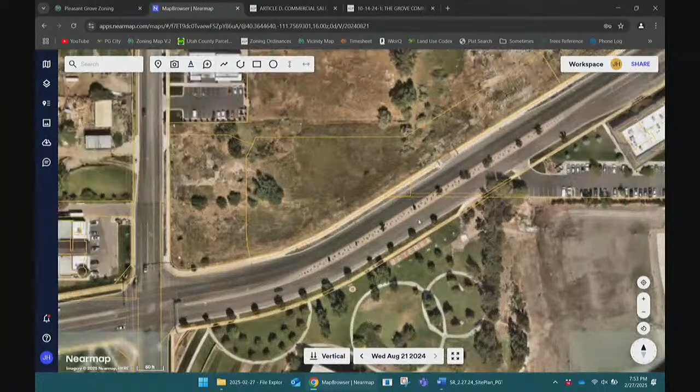This property fronts onto Pleasant Grove Boulevard, but access to this property will not be directly from Pleasant Grove Boulevard. Instead, it's going to be coming from that side over here, and we'll see that here in just a second on the site plan. Let me pull that up.

So we can see here on the aerial map how there's this road that comes through. This is going to connect up here to Pleasant Grove Boulevard, and from here, that's where access to this property is going to be. They're not going to get access from this side, because this side is a private road that belongs to the Green Grove Apartments.

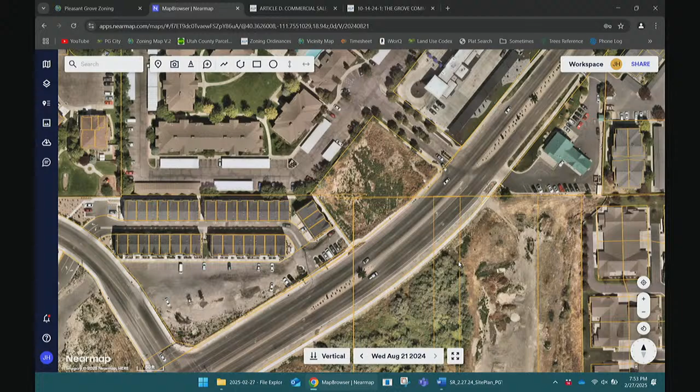What they're going to do instead, I'll go to the site plan now - even though they've got a little road here, there's going to be a fence that blocks off access for normal traffic from the private drive, from the private road. It'll be used for emergency services only. And if worst comes to worst, what they can do is install a geogrid thing, which compacts the ground a lot more, making it drivable for fire trucks, so they can plow through the landscaping there if they have to.

Because there is landscaping in that particular area, we're going to make sure that there's no trees or bushes that'll really get in the way, because that wouldn't be fun. But otherwise, yeah, that's the way the access for this property is going to end up going.

Continuing on with the site plan, the required building setbacks, including any area for parking, is 25 feet from the front property line down here. So this whole section is going to be all landscaping, except for points of access onto the property, meaning that little section right there.

There are no other setback requirements for this project, as the CS2 zone states that the rear and side yard setbacks are permitted to be reduced to 0 feet when adjacent to a commercial or industrial zone. Since it's surrounded by commercial zones, it gives them a little more room to make this site plan work. But to help out with the smaller setback requirements, there is an existing vinyl fence that was installed with the Green Grove Apartments on this side up here, which will help mitigate a lot of that difference between the residential use and the commercial use.

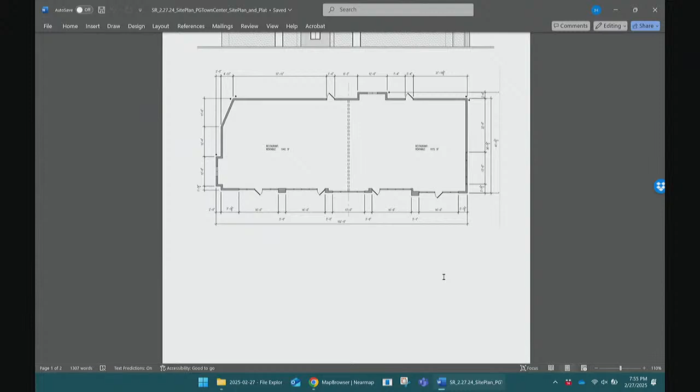Now the building will be split up into a couple different units. I don't think I have the floor plan here - oh, maybe it's down at the very bottom. There it is. So we've got two different units, both of these are going to be for restaurant uses, and each one is going to have their own individual drive-through. The parking requirement for restaurants is 1 space for every 3.5 chairs, or 1 to 100, excluding the kitchen, bathrooms, storage, etc.

Because we don't have a detailed floor plan that shows how many chairs they're going to have for each individual use - usually they'll provide that with the building permits - I did a parking ratio of 1 to 100 for the whole building, but then I reserved about 30% of it for what would usually be the kitchen or storage area or anything like that. In this case, I required 27 parking spaces on the property, and that's what they got - they got 27. So we're good to go on the parking.

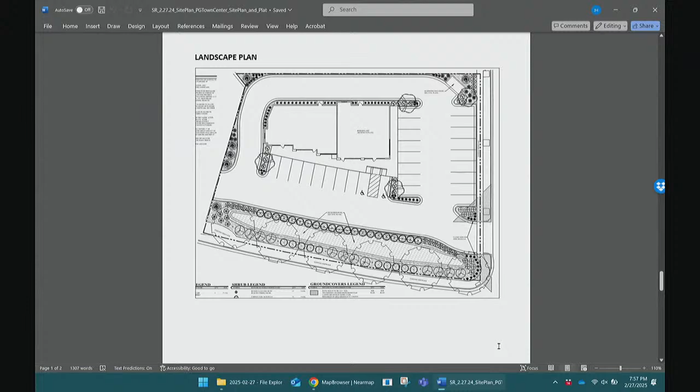Here is the landscaping plan. We'll need the applicant to amend this plan to account for the emergency access from Pleasant Grove Boulevard down here in this corner, just so they don't find themselves around a tree. But otherwise, the only other requirement is that they need to have at least 11 trees on the property, based on the ratio of 15 trees per acre of land.

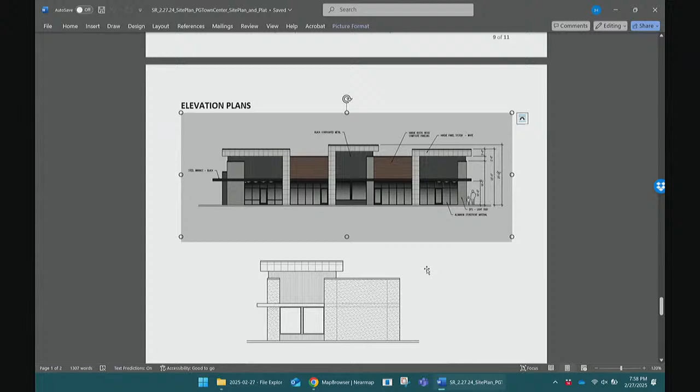I think that's about everything. So with that being said, I can take any questions. I can scroll through some of these images.

Anything you guys need? So on the site plan, Jacob, if you go there, or that, you stop. This one? You can go down one more.

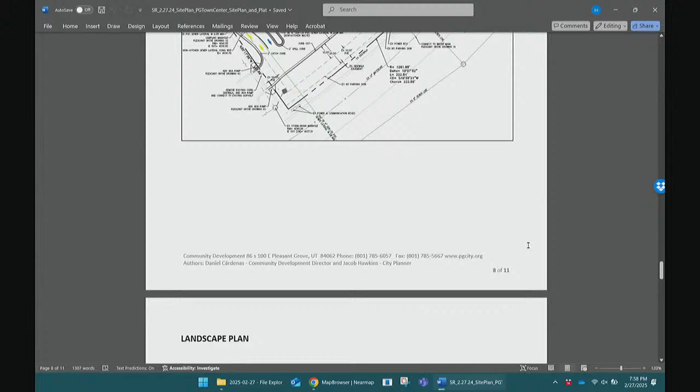Looking at that, even though the public access is going to be about right here, right? I'm curious about, it looks like that is an exit, even though it's not supposed to be an exit. The reason, and the other reason, wouldn't parking be a good thing for right here?

Not really, because this is kind of taking a belt and suspenders approach to emergency access, essentially. This is supposed to be the primary way for there to be emergency access, but because this is a private road here, if they decide to just block it off for whatever reason, since it's a private road, we still need to have some sort of access onto here. So instead of making the fire truck go through the landscaping every time there's an emergency, we want the primary thing to be there.

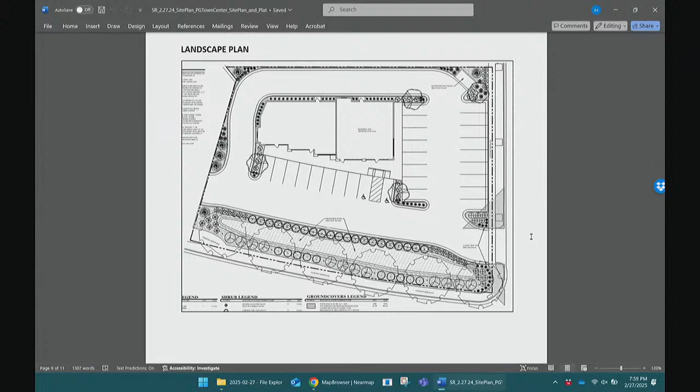Now, the other question is, because it's two restaurants, just looking at the drive-through plan, my assumption is that - so if you go up the one, there's a drive-through there, correct? The anticipated drive-through is here. Yep, and a drive-through is there. Okay, so I guess we can ask the applicant about traffic flow and what that looks like.

Got a nice little crisscross there, you see that? I see the crisscross. Hopefully the public will recognize the crisscross too. Those are the only questions I had. Thanks. Any other questions for Jacob? Thank you, Jacob.

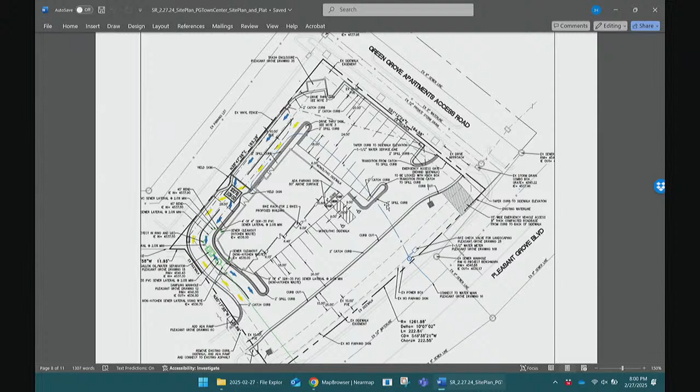All right, is the applicant here? Maybe you could just state your name for the record. Tom Longacre with Acres Development Group.

So the crisscross you had a question about - yes, it's an interesting development that's taken shape the last few years. It was talked about, how do we make homes pencil, or projects pencil. We've probably spent 40 to 50,000 of our dollars to try to come up with a plan for this site that pencils and works, and we need 2 drive-throughs for it to pencil. This project conception to have the 2 drive-throughs, we've seen done in various projects down in St. George, Santa Clara. I'm doing one right now with Panda Express up in Brigham City, and it is a new concept. The public does figure it out, it is a little bit of a process. We have this do-not-block area, and that's where people that have ordered their food are able to exit, and people are waiting. There'll be strong line indicators, there'll be arrows, and they will move forward as long as there's not a car blocking that area.

It was a concern, it's been a concern. I've done Panda Expresses for 20 years, and the fact that they're entertaining one like this, it's something they've had to wrap their heads around. They have 2,000 locations, but it's one that they're willing to pursue. And down in St. George, Santa Clara, if you were to visit, you'd see that it does work. Is there any physical barrier between those 2 lanes, or is it just all markings? It's markings.

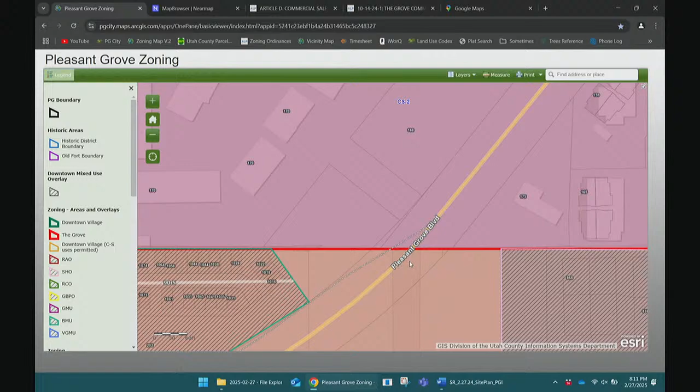Can we combine 5 and 6? Okay, so we are going to hear item number 5 and item number 6 together. Public hearing to consider the request of Dana Fairbanks for a 4-lot preliminary subdivision plat named PG Business Park 3, Plat B, condo plat located at approximately 364 South, 700 West on approximately .87 acres in the manufacturing distribution zone. And item number 6, public hearing to consider the request of Dana Fairbanks for a commercial site plan to develop a 1-story multi-tenant warehouse building located at the same address on approximately .87 acres in the manufacturing distribution zone. All righty. Hi, Jacob.

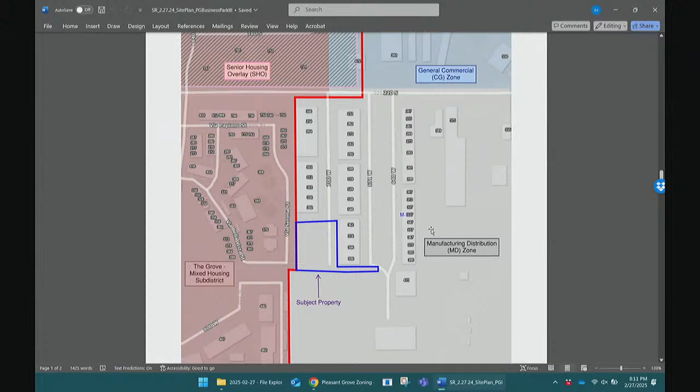So this next item is for Dana Fairbanks for a property located at approximately 364 South, 700 West, which is just on the other side of State Street. Let me go here - I like this one better. So we've got State Street right here, and then we're just up over here, essentially on the other side of State Street, this one right down here next to all these other warehouses.

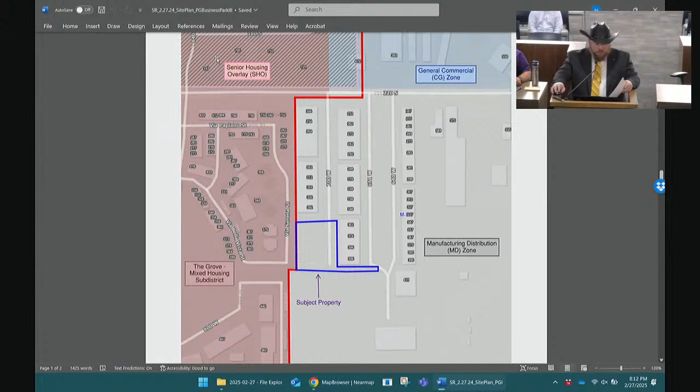So starting off with the zoning map, this property is in the manufacturing distribution zone, the same with all of these properties over here to the east and to the south. We've got a bit of general commercial up in this corner fronting onto State Street, and we've also got some condos and townhomes over here, all in the Grove Mixed Housing sub-district. These were built after these warehouses were built.

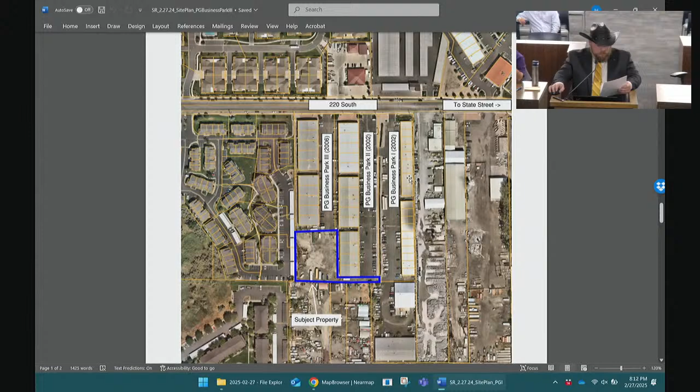As we can see here on the aerial map, this is a little bit better view, so you can see where all those condos are and the townhomes, and we've got some self-storage up here. So the applicant is intending to develop this property with more of what's already there - it's just going to be a 1-story multi-tenant warehouse building that will be split up with each unit being on its own lot, essentially because it's a condominium plat.

This one has a little bit of an interesting history as well. Development for this whole area began back in about 2002 through 2006, so this one was first. Actually, let me get this out because it's brighter. So these properties were done first through PG Business Park 1, and then these ones were next for PG Business Park 2, and then these ones were after that for PG Business Park 3.

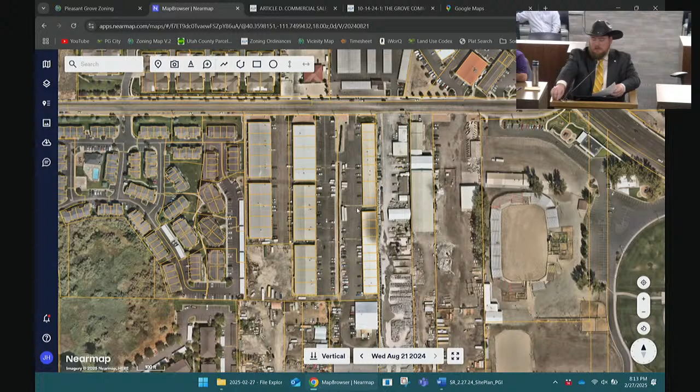Now, PG Business Park 3 included all of this, including the subject property at that time. So when it was first approved, all of it was just the one property, and so it met all of the zoning ordinances back then. The same thing for tonight, essentially, because a lot of that stuff has already been taken care of, and a lot of it's going to be taken care of for tonight's plat as well.

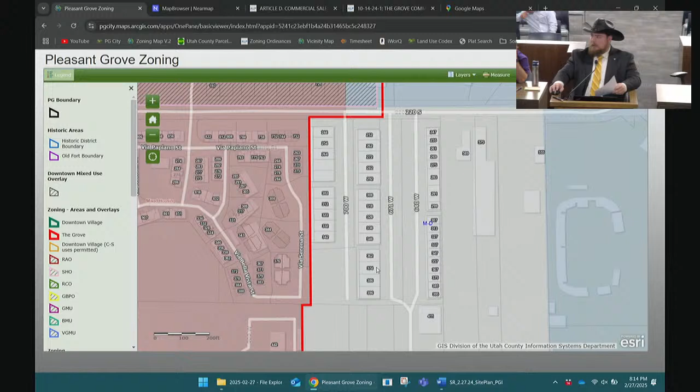Going into the requirements that have already been met: the manufacturing distribution zone requires a minimum lot area of 1 acre per lot, which isn't really possible since it's a condominium plat and you can't make each unit a whole acre. That was handled with the previous version because this whole area was greater than 1 acre at that time. The minimum lot width was 100 feet, and the setback requirement is 25 feet from the front property line, which is up here.

So all that has been taken care of, and the required landscaping is only required for the front yard areas and the side yard areas adjacent to a public street, so that's taken care of. Otherwise, because it's in the manufacturing zone, there are no design requirements for any of the buildings.

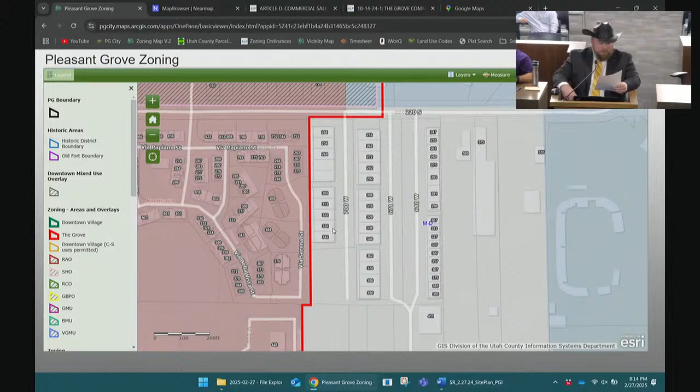Even so, the proposed building will be about 22 feet tall. Let me go to that. There's a landscape plan—they're going to do kind of rock mulch back here. Here's the elevation plans. It's going to be about 22 feet tall, the exact same as all the other buildings already there—a metal building, and on the front, which faces the parking lot, they'll have about 7 feet of brick for a wainscot, essentially.

Because this building is manufacturing in nature, there's a parking requirement for warehouses, manufacturing establishments, and all industrial uses: 1 parking space for every 6,000 square feet of gross floor area, or 1 parking space per employee at the highest shift, whichever is more restrictive. But we don't know how many employees there will be, so we're going with the square footage for right now.

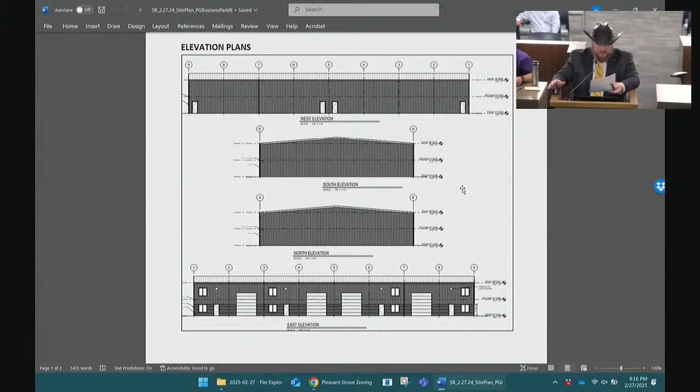In this case, technically only 3 parking spaces would be required, but the applicant provided a few extra details for how much space would be used for an office, a mezzanine, and the warehouse area. So they provide 26 parking spaces for the building. 17 of those spaces, as you can see on the site plan, cross over the property line. What the applicant will do is record an easement with this property at the same time as the plat is recorded, ensuring that parking stays there.

Ultimately, staff recommends approval of the proposed plat and site plan, and I can take any questions if you have any.

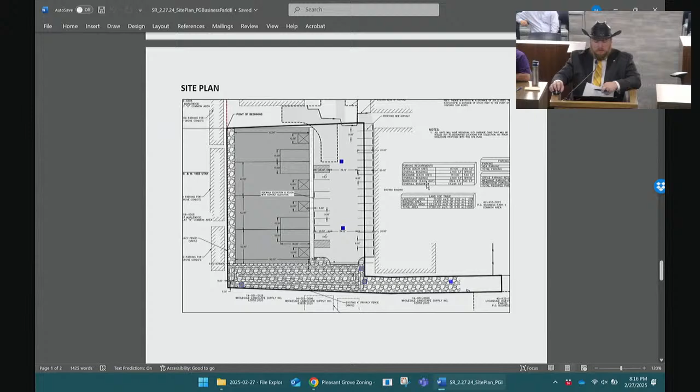What's it being used for right now? Is it for storage of RVs and? It's nothing right now, really. On the current subdivision plat it was labeled as future development, and they're kind of using it as a drainage easement, and there's technically a really little wetlands area right in the middle. I don't really think it's there anymore because it's kind of just dirt there. So it's just vacant for right now, but with this they're just going to put up the warehouse and make it the same as all the other ones.

If there was a wetland there, shouldn't there be an environmental study to make sure it's not there anymore? Commissioner, Chair and Commissioners, during the process of this review we actually went through that process, talked to the Army Corps of Engineers, and verified that—because their map shows it is a wetland, and that's where that came about. That's what Jacob was referring to.

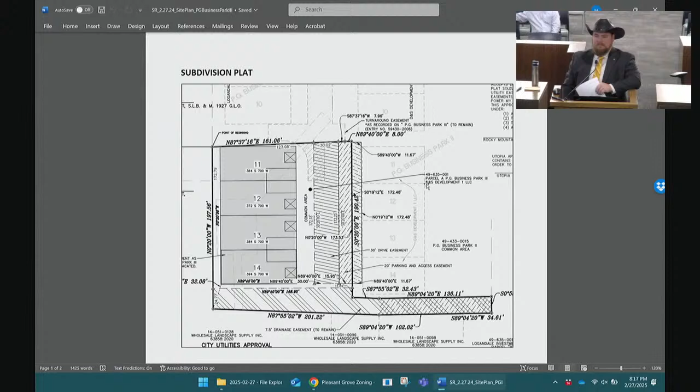In the process of talking to the Army Corps of Engineers, they mentioned that sometimes places made into a detention basin—they flew over with LiDAR, if you're familiar with that. Basically they scan the earth and see something that looks like a depression that might have water in it, and it might be a wetland. So they actually put that in as a level of a wetland.

But in this case, it was a detention basin that was put in, like Jacob mentioned, as part of the other plat, and they're just relocating that to the south end of the property while still managing all that water. So there really is no wetland there—there never has been, and there won't be. There are some in the neighborhood, so it's a very valid point to verify and check, but this particular property doesn't have that, and the Army Corps does not have a problem with the development that's happening.

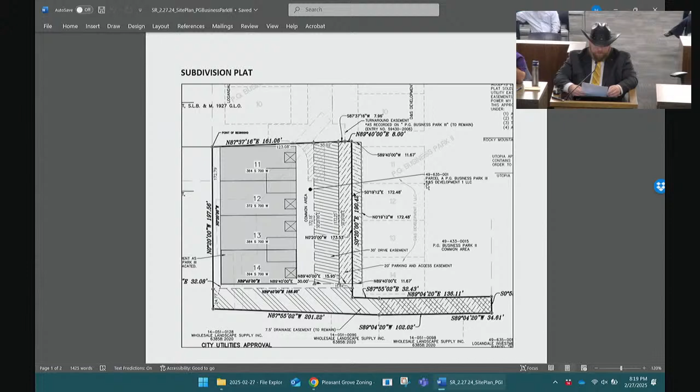Any other questions for Jacob? For the parking, what did you say he was going to get with the adjacent property owner? So he is the adjacent property owner right now, but what he's just going to do is record an easement on that property.

He is the property owner. I was going to say if we needed to make that a condition of approval here, we could, but if he owns both properties, he's probably going to give it to himself. Yep, it's gonna be a long meeting.

Yeah. You can argue with himself. Thank you, Jacob. Thank you.

Is the applicant here? Do you want to come up to the podium? You don't have to, but if you'll just state your name for the record.

My name is David Fairbanks. I'm sorry that Dana couldn't be here tonight, so he sent me. What questions might you have for me? Anyone have any questions? Everything was straightforward what Jacob presented? Anything else you want to add? Yeah, I just hope you approve it and move forward.

Thank you. This is a public hearing, so the public is welcome to approach the podium. Seeing none, I will close it to the public and bring it back to the commissioners for discussion or a motion.

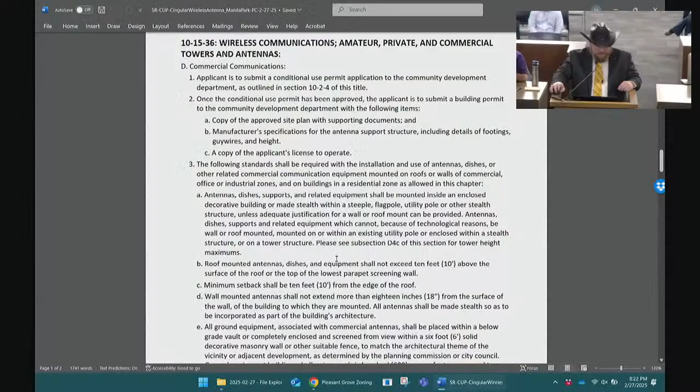Thank you, Madam Chairman. So this last item for tonight is for a communication antenna located in Manila Park. It's a little hard to see here, but it is right there — can you see that? The little cloud thing right there, right next to the fences for the baseball fields out there.

This item was heard by and approved by the Planning Commission back on March 24th, 2022 with conditions. Fun fact, this was my very first Planning Commission meeting here, so it was kind of fun. However, no work had been done for the conditional use permit, and the permit expired after 12 months of having no work done, which meant they had to reapply before beginning construction on their project. So basically this is the exact same thing as last time, same conditions, same everything.

As a refresher from last time, the applicant is New Cingular Wireless PCS LLC, and they want approval to construct a new single antenna attached to the light pole of one of the light structures for the baseball field at Manila Park, located at 1555 North 100 East Street, and also install a single equipment cabinet on the ground adjacent to the building, as well as a diesel generator.

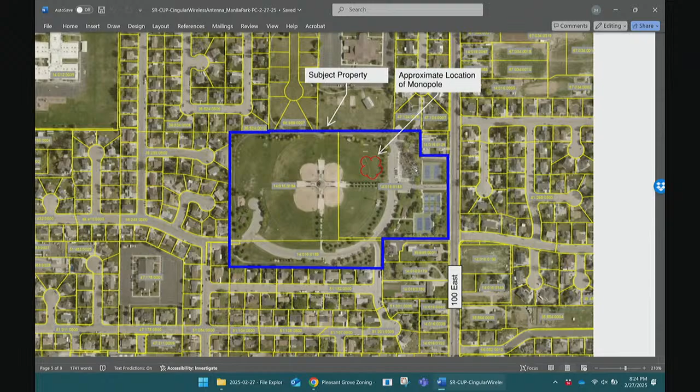It's going to look something like this. So here's 100 East, and then here's where that equipment is going to be, as well as where the pole currently is and where the tower will be installed.

There's currently two different antennas from different providers on the premises, so this would be the third entity to use the city-owned light pole infrastructure and pair it with an antenna intended for wireless commercial communication. Zoning ordinances require that communication antennas or towers may be permitted in a residential zone only if on public property, or property in conjunction with a quasi-public use, such as a school, a park, a church, or government property.

There are also a couple conditions of approval for this, such as the antenna can only have a maximum height of 100 feet, and the pole needs to be set back at least 225 feet from property lines.

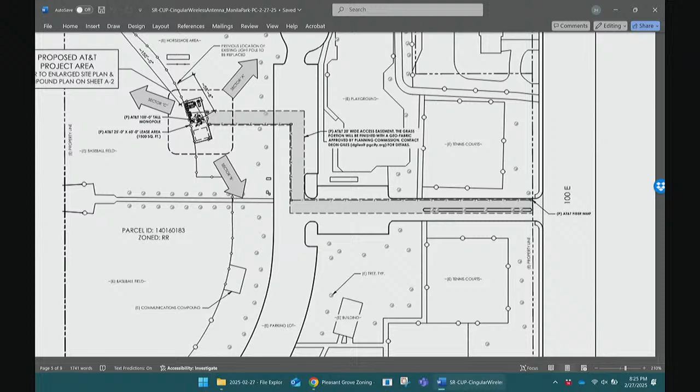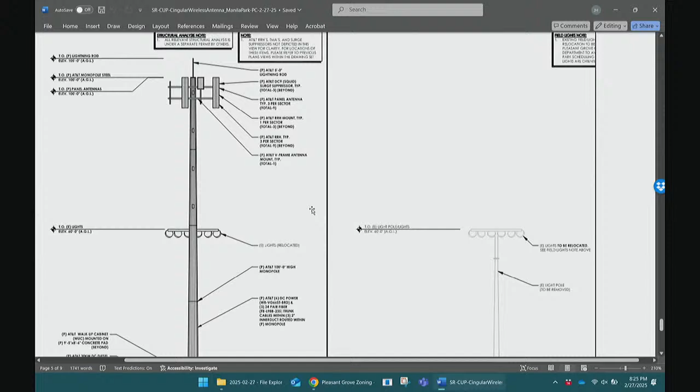This is a zoomed in view of what the site will look like. They've got the generator right here, and then the ground single equipment cabinet, and here's where the pole is right there.

Currently it looks like this side, where it's coming up here, and then there's just the lights, and this is what it's going to become. So this is pretty much as high as it can get.

We don't count the lightning rod against the maximum height coverage, but all of these little radar things, that's where we would count the height against them. So they're going up as tall as they can, and the antenna is also located approximately 250 feet from the northeast boundary, so the proposed steel monopole would meet the required setback.

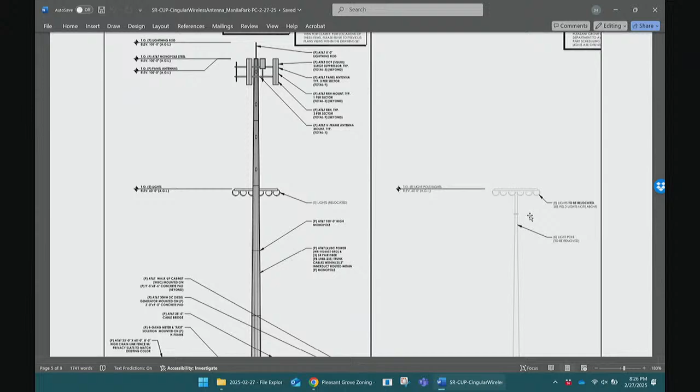In order to mitigate the possible impacts of the structure, and in keeping with safety and general welfare, conditions of approval need to be established for the proposed use and structure. The conditions are listed in City Code Section 10-15-36, which I can pull up.

10-15-36. All of these requirements are required for the applicant to follow. We've got some setbacks, conditional use permit required, all that kind of stuff. I can go through some of this more if you want, but ultimately all of these requirements are to be met.

In addition to the conditions already established by code, a lease agreement would have to be prepared by staff and approved by City Council. The lease agreement will contain a revised site plan and additional conditions.

Furthermore, the Parks and Recreation Department has come up with three other conditions that would be beneficial for the future maintenance of the park, which include the installation of a sight obscuring fence. You see here, where all of this stuff is, this would all be where the sight obscuring fence should go.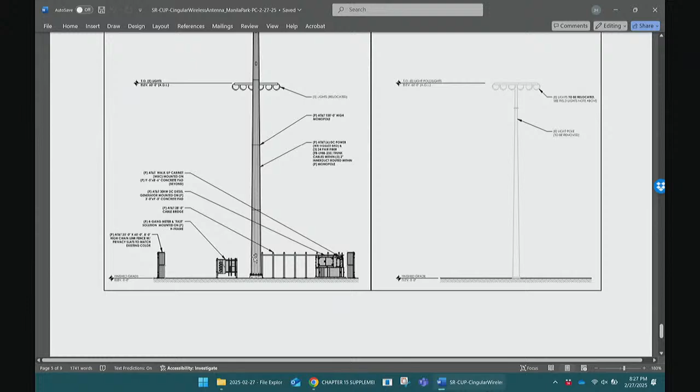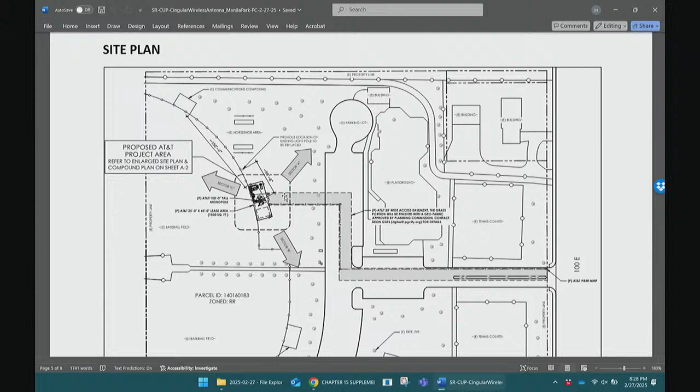Coordination with the Parks and Recreation staff at the time of installation is the other condition. The sight obscuring fence would go around the entirety of the area where there would be ground equipment, so around this whole area.

Which is located around the base of the pole and looks like this. The fence would also need to be at least 8 to 10 feet tall, as the ground equipment is already roughly 10 and a half feet tall, so we need to cover up as much of that as we can.

Staff recommends approval of the conditional use permit with the following conditions: first, installation of a view obscuring fence; second, placement of geofabric along the access path; third, coordination with Parks and Rec staff at the time of installation; fourth, completion and approval of a lease agreement by City Council; and fifth, all planning, engineering, and fire department requirements are met. I can take any questions.

I'm sorry, Jacob, did you say how tall the fence is going around it? It needs to be 8 to 10 feet tall. Minimum of 8, maximum of 10.

It's exactly what we heard last time. It was before your time, though.

Do we know how tall they want to do it? Minimum 8, maximum 10, are they gonna do 10? I don't know. Do you know if they're doing an 8 or a 10?

The other question that came up last time is if errant baseballs get into that fence, how do people retrieve them? You don't want kids trying to climb over and getting in there. Is there any provision made to retrieve them?

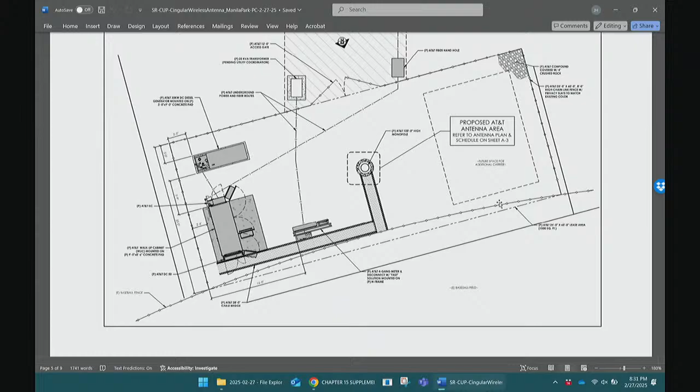It's the Sandlot all over again. I literally watched that movie before I came here today. It's gonna be a nice English Mastiff that lives in there. It's gonna be great.

All right, you doing a motion, Ron? Sure, I can do a motion.

I move the Planning Commission approve the request for Cingular Wireless PCS LLC for approval of a conditional use permit for the installation of a tower for commercial communications and ground equipment on property located at 1555 North, 100 East Street, Manila Park, in the rural residential zone, and adopting the exhibits, conditions, and findings of the staff report, as modified by the conditions below: 1, installation of a view obscuring fence; 2, placement of geofabric along the access path; 3, coordination with the Parks and Recreation staff at the time of installation; 4, completion and approval of a lease agreement by the City Council; 5, the cabinet height situation is addressed during the lease agreement process.

6, a netting is included to prevent stray baseballs from entering from the field side. And 7, all final planning, engineering, and fire department requirements are met.

I'll second. I have a motion by Commissioner Butler and a second by Commissioner Martineau. All those in favor say aye. Aye. Any opposed? Motion carries.